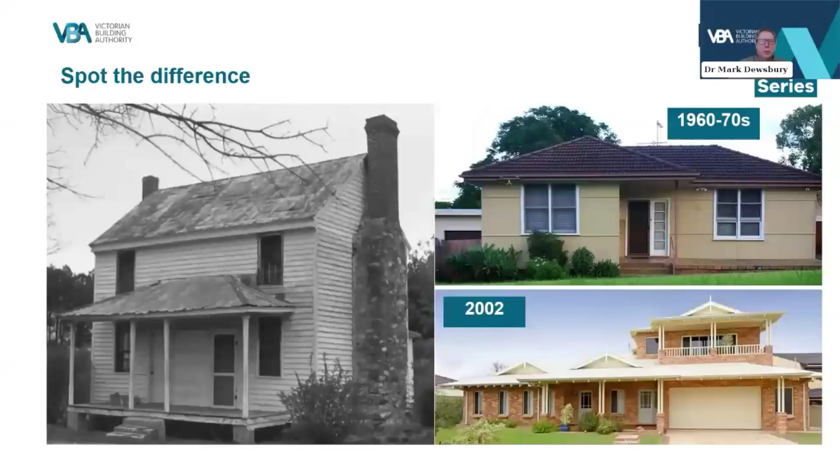When it comes to NATHERS, or the Nationwide House Energy Rating Scheme, and energy efficiency, we know that these two things are intrinsically linked to human thermal comfort. Two-thirds of how we experience the environment is the temperature of the surfaces around us - the floor, the walls, the windows, the doors, and ceiling.

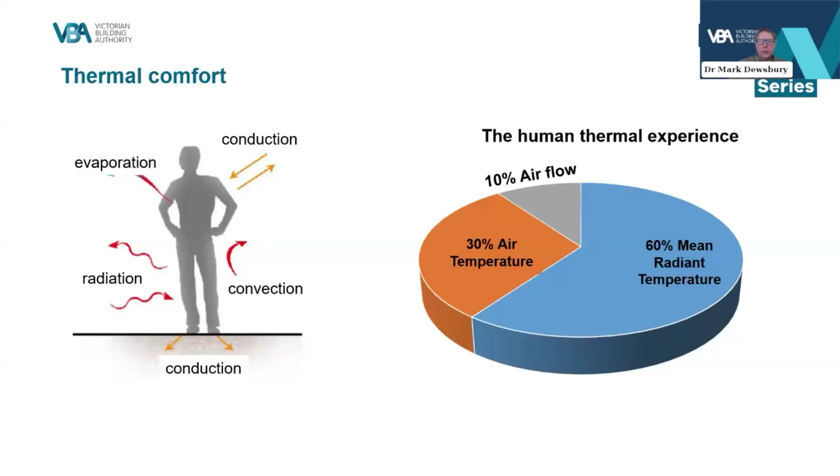We need to condition those surfaces to within our thermal comfort expectations using the least amount of fossil fuel-derived energy possible.

But we also need to consider how we protect our building during construction. We've used weather-resistive pliable membranes for decades to protect the structure whilst under construction and after completion. This stops the wind and moisture from progressing into the insulation layer. We also need to ensure that the cladding doesn't touch the weather-resistive pliable membrane, as between 1% and 7% of the wind-blown moisture reaches the interior side of the cladding systems.

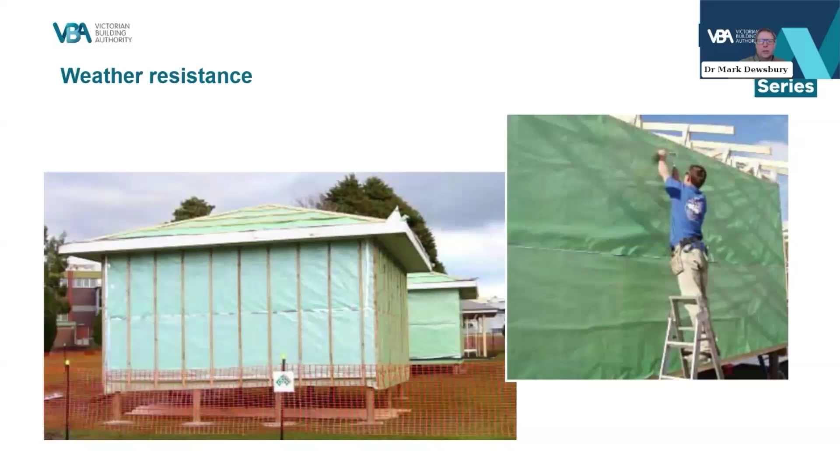We've also known for more than 50 years that these materials need to consider water vapour diffusion.

We all know about insulation. This should be installed hard against the floor, walls and ceilings with no gaps to minimise the energy needed to condition those surfaces. Importantly, our glazed windows and doors are also critical components of our insulation.

Airtightness and solar control systems - a common problem with many high-efficiency homes is overheating due to a lack of solar control.

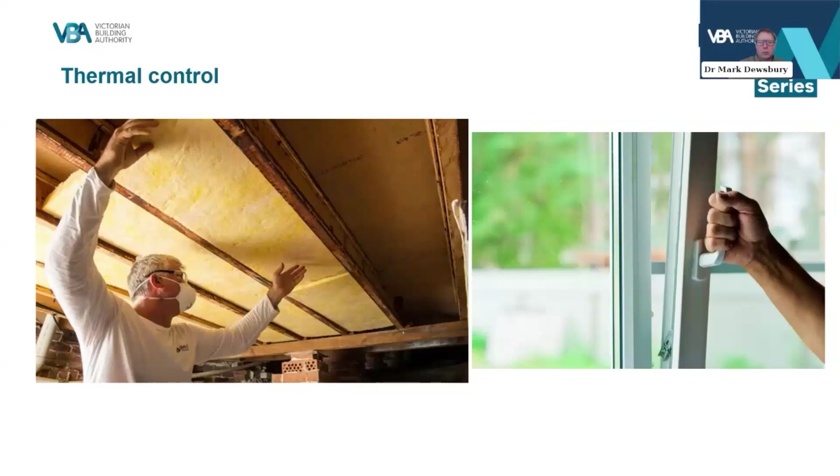Airtightness is critical in all climates, as it reduces the thermal comfort impacts of cold and hot drafts into the home. Within the NCC, or the National Construction Code, closely fitted plasterboard, skirting boards and cornices are our principal actions for airtightness.

When a house is new, this may be a good process, but as a house ages and the structure shudders under the force of many storms, small gaps appear, making the home less airtight and allowing lots of water vapour into external walls.

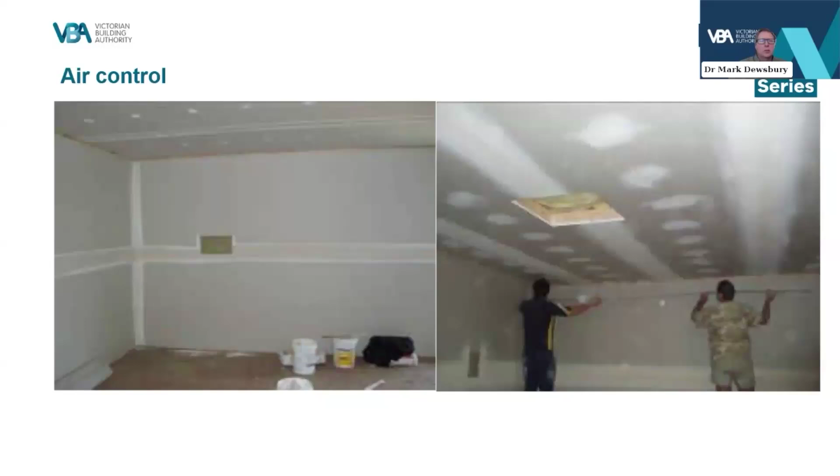Since 2016, the National Construction Code expects all homes to have a maximum air leakiness of 10 air changes per hour when a 50 Pascal pressure difference is applied.

A 50 Pascal pressure difference equates to a 32 kilometre breeze. This would mean that when a breeze of 32 kilometres is blowing, the air in the house changes 10 times in 1 hour. When a breeze is not blowing, the air change rate could be as low as 0.5 air changes per hour. So subject to the outside wind speed, the conditioned air in the home changes somewhere between 0.5 and 10 times every hour.

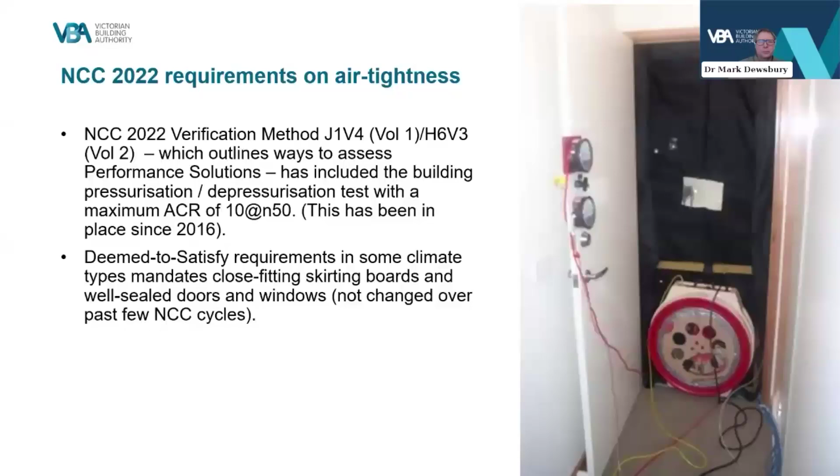Anything under 5 should have a balanced mechanical ventilation system to provide fresh air into the home. Everything over 10 doesn't meet the expectations of the community or the building regulations.

And since the 1980s, international experience has shown that anything under 8 air changes at N50 should have hygrothermal design considerations for the floor, roof, and external wall systems.

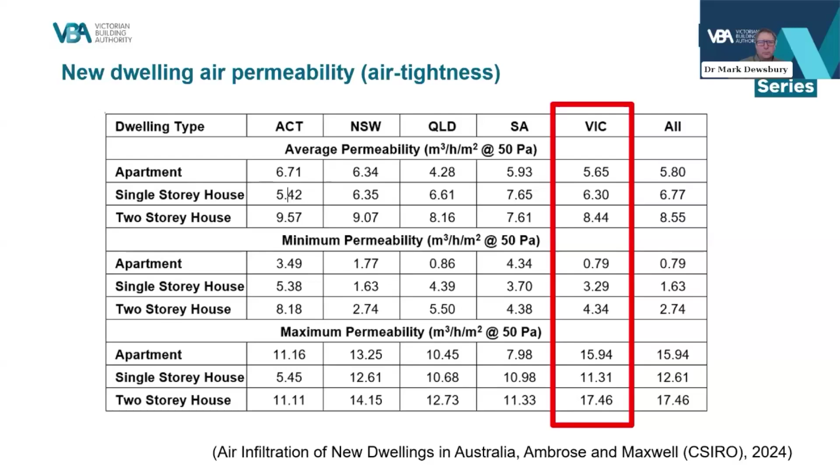Now, really importantly, ventilation is not air tightness. In Australia, we've never had a culture of ventilation. Our historically leaky homes did all the ventilation for us.

Within the building regulations, to avoid the need for mechanical ventilation, every habitable room needs access or borrowed access to an operable window. These windows need to be open every day to ensure that we are getting at least 0.25 air changes per hour in every room.

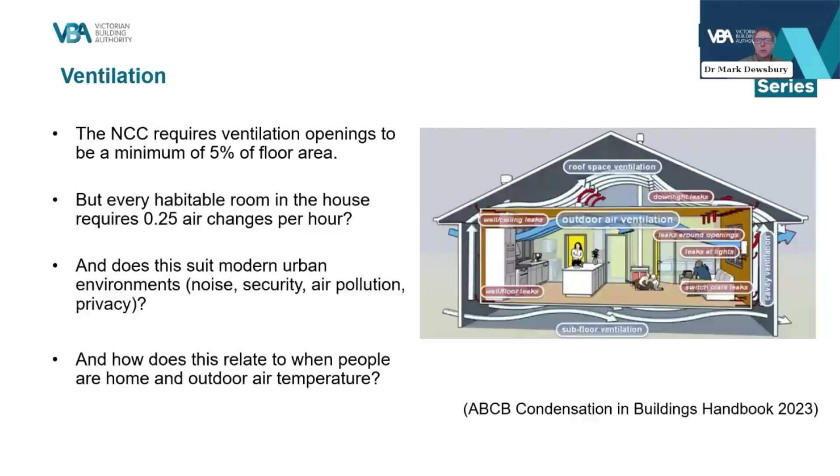But how does this relate to urban living or modern living? The hours spent at work, or the outside air temperature?

If we are trying to heat a home, why would we also open windows in every habitable room to ensure we have the required 0.25 air changes per hour? This highlights a misalignment in the regulations.

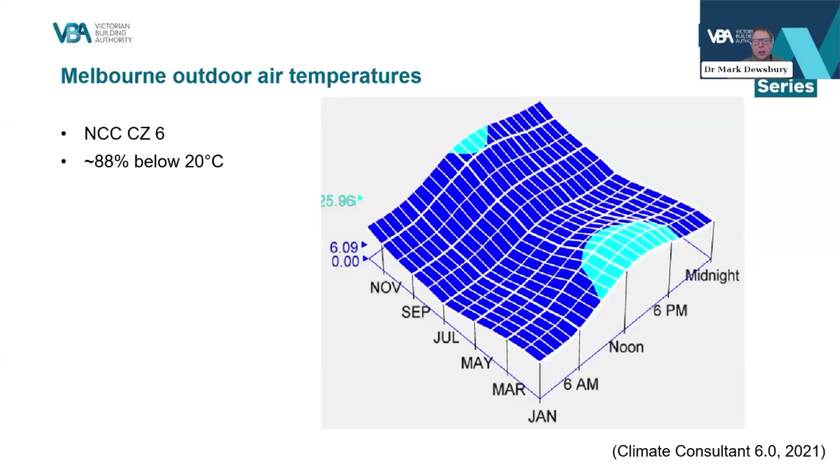Which brings us to condensation. Think of going to a club or a bar and asking for a cold drink. As the bartender fills the glass, condensation forms. But a few minutes later, the glass is dry.

In the first instance, the coolness of the drink forces the air around the glass to condense on the cold glass. But as the drink warms, the condensation returns to the air as water vapour. This process happens every day in our backyards, subfloor spaces, roof spaces, and exterior wall systems, and on single glazed windows.

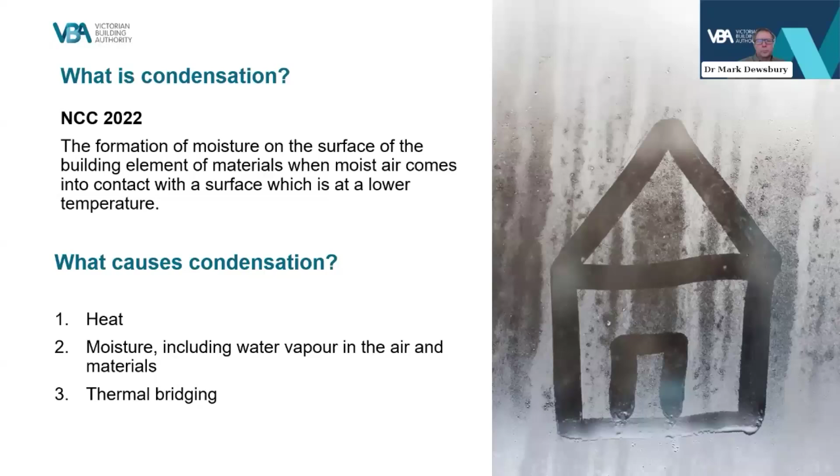If our living room is 20 to 22 degrees Celsius and our interior relative humidity is 80%, the dew point temperature, or temperature at which condensation occurs, would be 18 degrees Celsius. That indicates that any surface that is 18 degrees Celsius will support condensation.

If we manage the interior relative humidity to a maximum of 65%, we can reduce the dew point temperature to 15 degrees Celsius.

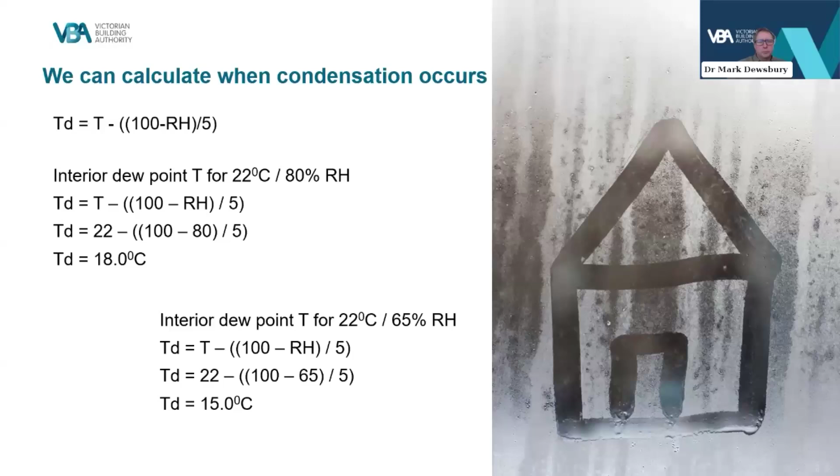What we haven't mentioned yet is the 10 to 14 kilograms of water vapour a family of four generates each day. This is not the liquid water from bathroom, kitchen and laundry activities, this is purely water vapour. As we keep adding more and more water vapour, we need to remove it from the building interior. Otherwise, surface and interstitial condensation and mould can occur.

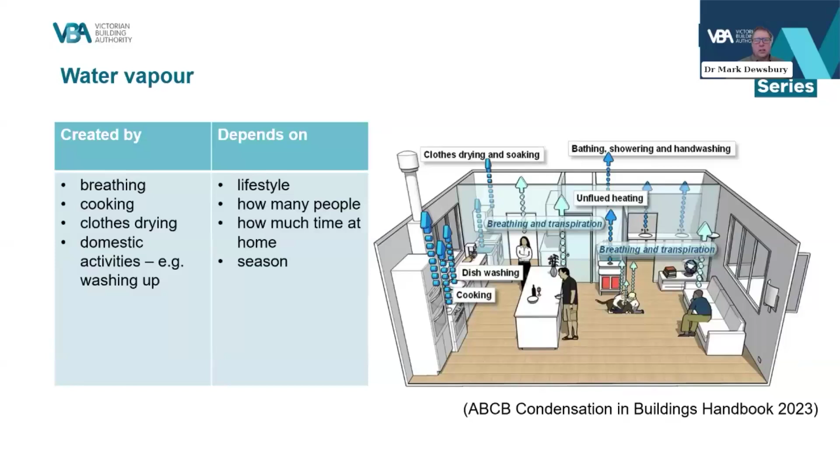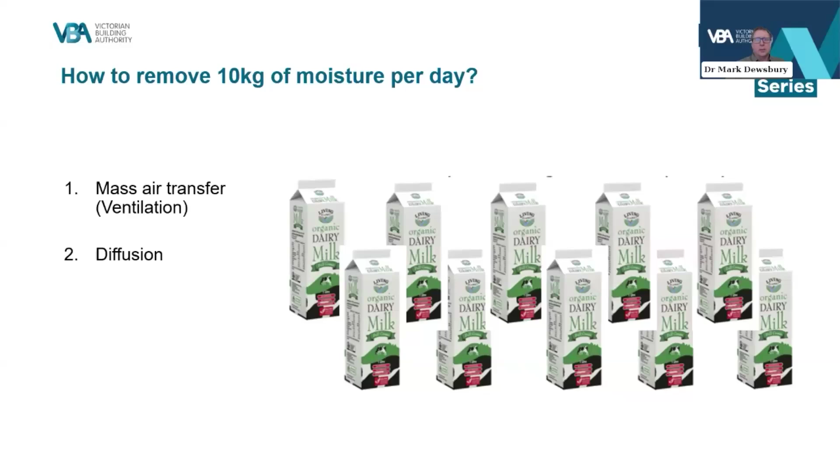We generally have two methods to remove occupant-generated water vapour in temperate climates, namely mass air transfer, or more commonly known as ventilation, and water vapour diffusion.

As the interior relative humidity increases, many materials in our home adsorb water vapour. Conversely, when the interior relative humidity decreases, many materials give water vapour back into the room. Technically, we call this hygrothermal buffering.

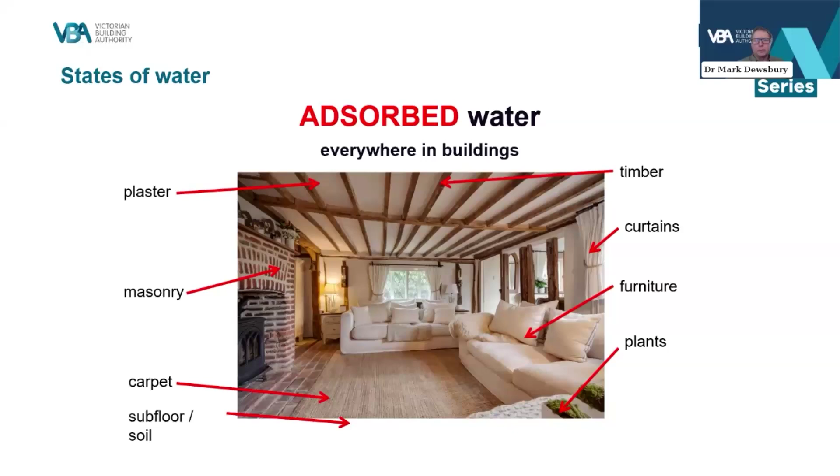This highlights that we can't stop condensation from occurring, but we need to manage interior generated water vapour, minimise thermal bridges, and design subfloor zones, roof spaces, and exterior wall systems to maximise drying potential.

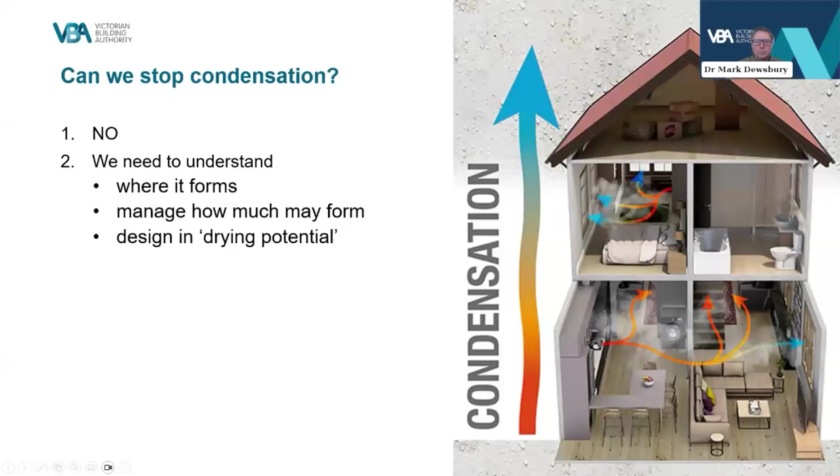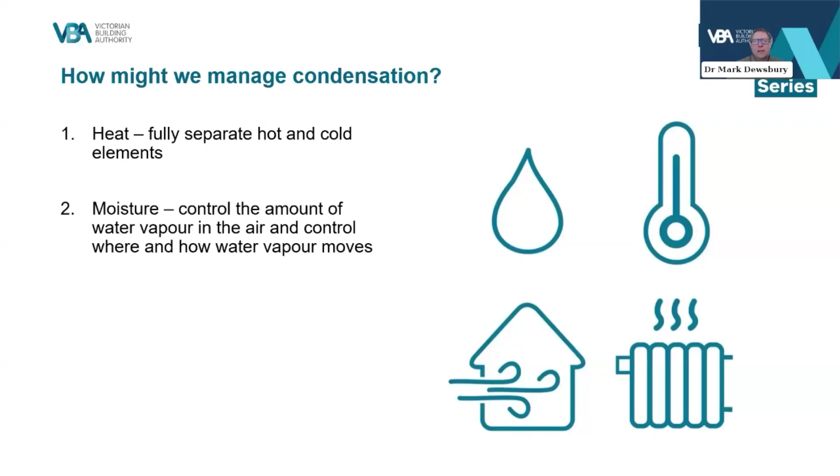So how might we manage condensation? When we think about heating, we need to fully separate hot and cold elements. In terms of moisture, control the amount of water vapour in the air and control where and how water vapour moves.

We now have a short quiz. Can you stop condensation from happening in homes? Yes or no? And what causes condensation in homes?

Now that you have finished the quiz, the answer to question 1 is no, that we cannot stop condensation happening in homes. And the answer to question 2 is all of the above. Our cooking, showering, breathing and drying clothes all contribute to condensation in homes.

This now brings us to mould. When we don't adequately control interior generated water vapour, condensation becomes very apparent very quickly.

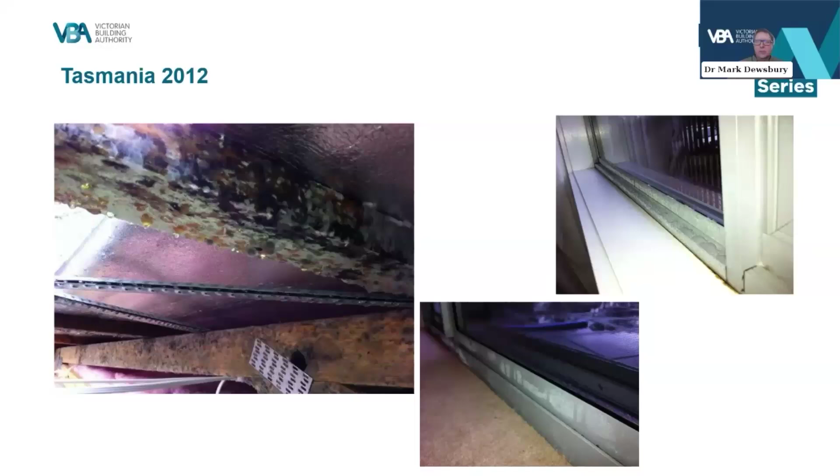Here we can see images on the left with condensation and mould in a roof space, and images on the right with condensation and mould on single glazed windows. All of these images are from homes that were less than 6 months old.

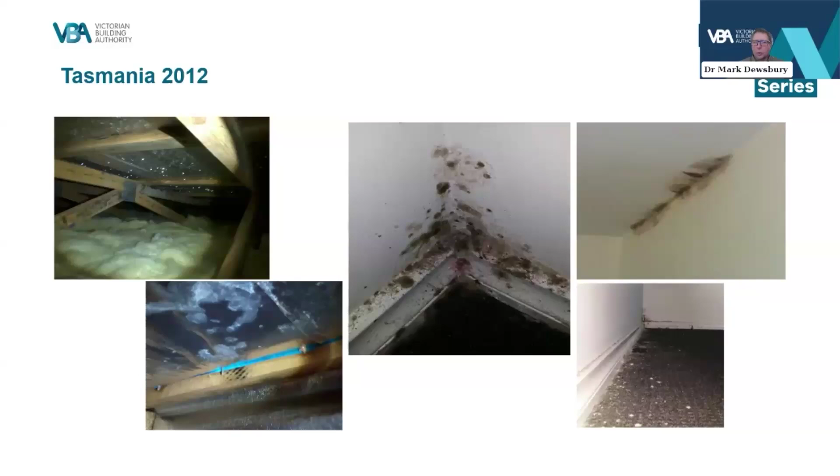Historically, Australians seem to have a love affair with mouldy homes. But since 2009, the World Health Organization has stated that no home or workplace should have a visible presence of mould. We can do a quick internet search and find a plethora of articles from very sick building occupants that have resulted from surface and interstitial mould in buildings.

Mould spores create an allergic reaction. They are so small that when we breathe them in, they travel through our lungs and straight into our bloodstream. Our body's immune system then kicks in to fight this contagion.

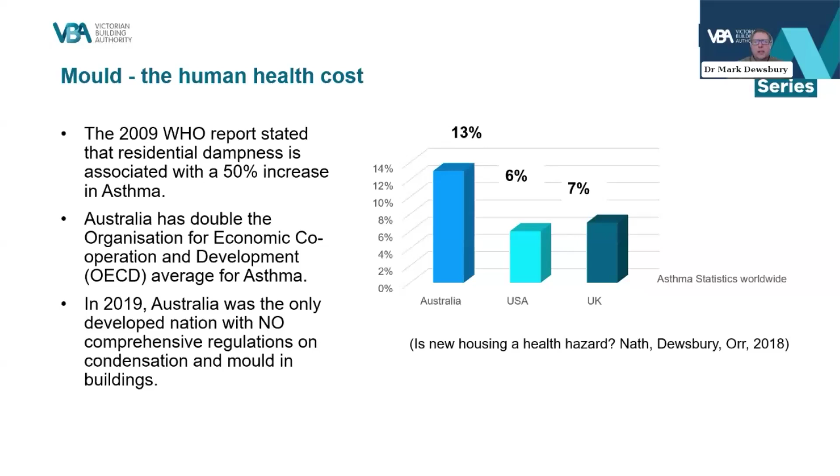Until 2019, Australia was one of the few developed nations that did not have any condensation or mould related building regulations, and we have had twice the asthma rate of many OECD nations.

So the NCC, or National Construction Code, and condensation. As mentioned earlier, since 2019 the National Construction Code has included some clauses regarding condensation in Class 1 and Class 2 residential buildings. Even though there has been lots of science since the 1930s, Australia's first national action was in 2016, a survey of design and construction professionals which identified that up to 40% of buildings constructed in the previous decade had a concerning presence of condensation or mould.

In 2019, the NCC required the use of a Class 3 water vapour permeable, weather resistive pliable membrane in climate zones 6, 7 and 8. In 2022, this was increased to a Class 4 water vapour permeable membrane in climate zones 6, 7 and 8, and added a requirement for a Class 3 water vapour permeable pliable membrane for climate zones 4 and 5.

But is this enough? The University of Tasmania research and the research conducted by the University of Wollongong suggest that it may not be enough. To partly address this gap, the draft version of the 2025 NCC has added requirements for all climate zones, and is likely to include a ventilated and drained cavity for all cladding systems.

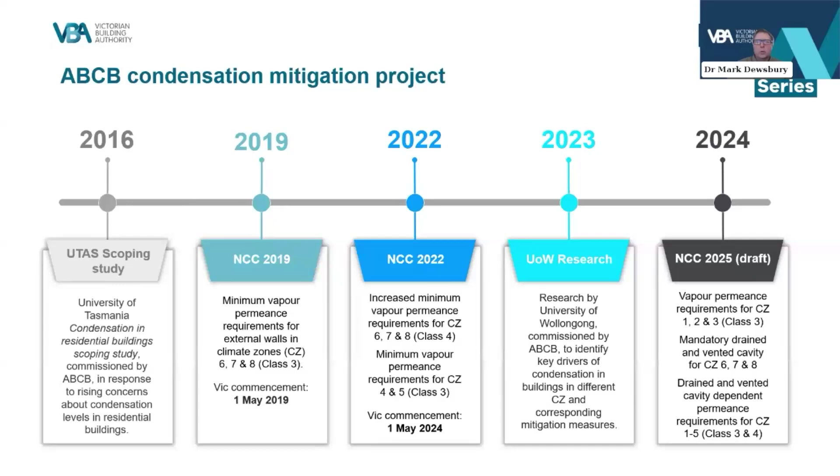As mould spores affect human health, the other significant change for the 2022 National Construction Code was the shift from focusing on condensation to focusing on mould.

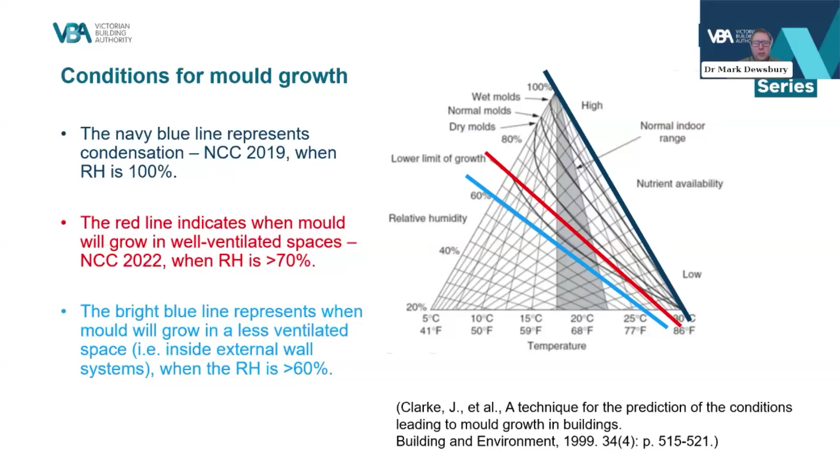This graph illustrates what we know about mould growth. Mould needs water vapour, temperatures above 5 degrees Celsius, and food. The blue line shows 100% relative humidity, or when condensation occurs, and this was the focus of NCC 2019. The red line shows 70% relative humidity, when mould will grow in a well-ventilated space, and is the focus of NCC 2022. The bright blue line shows 60% relative humidity, when mould will grow in poorly ventilated spaces, like the interstitial subfloor, roof spaces, and external wall systems, and on poorly ventilated surfaces around the home.

The 2022 NCC listed a new verification method that stipulates that an external wall system should not have a mould index that exceeds 3. Mould is all around us right now in its microscopic form, but it is invisible. When we change the conditions, its rate of growth increases and it can become visible. Overlapping the World Health Organization's recommendations, a mould index of 3 is when the mould becomes optically visible, or we can see it with the naked eye.

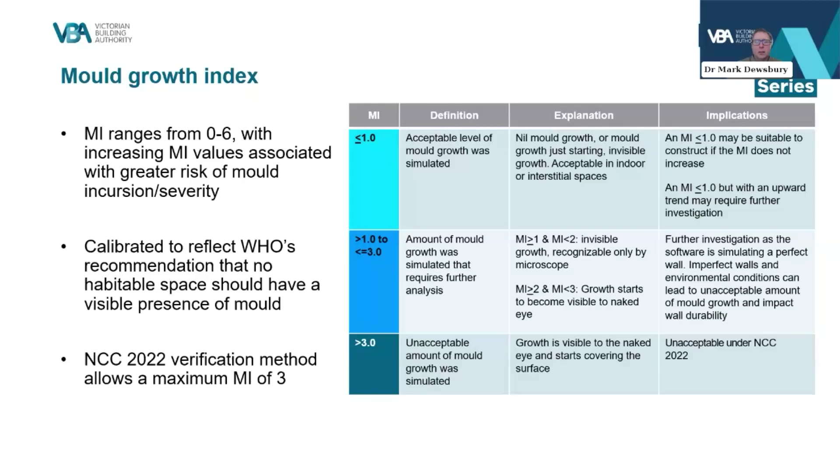To help address some of these issues, the 2022 NCC added enhanced requirements for interior and roof space ventilation. These actions are good, but for a house interior, the extra extraction ventilation described for bathrooms and kitchens is still relying on a leaky home or windows being left open in all rooms.

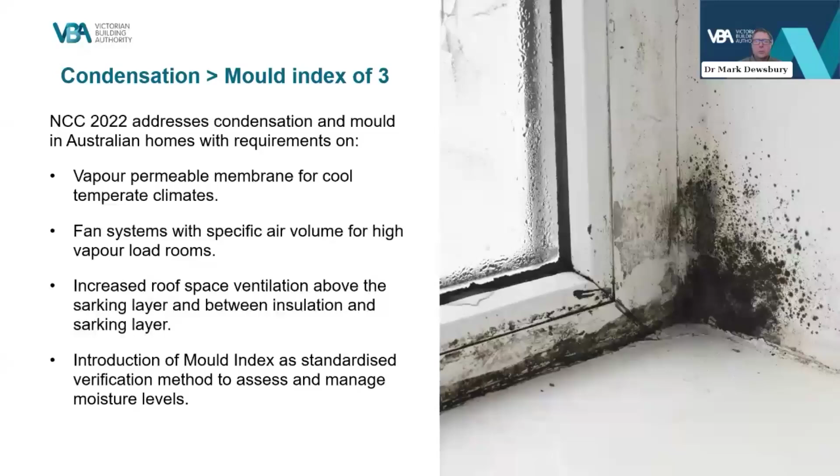As mentioned a few slides ago, there have been increases in the water vapour diffusion properties of exterior weather-resistive pliable membranes. Australian Standard 4200.1 describes the physical properties for pliable membranes that we may place on our exterior and interior walls and within our roof spaces.

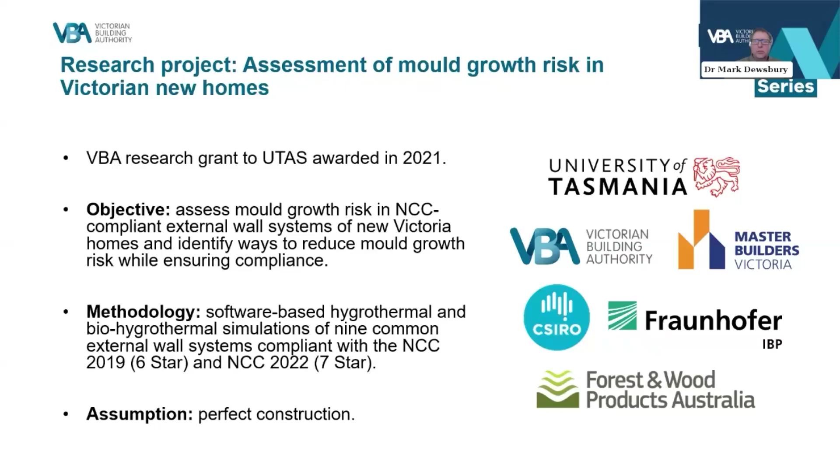This brings us to our research and our research insights. The University of Tasmania, in collaboration with CSIRO, Master Builders Victoria, the Fraunhofer Institute of Building Physics, and Forest & Wood Products Australia, obtained a research grant from the VBA to further explore what may be needed to address moisture and mould risks in modern energy-efficient low-rise, timber-framed external wall systems constructed in Victoria.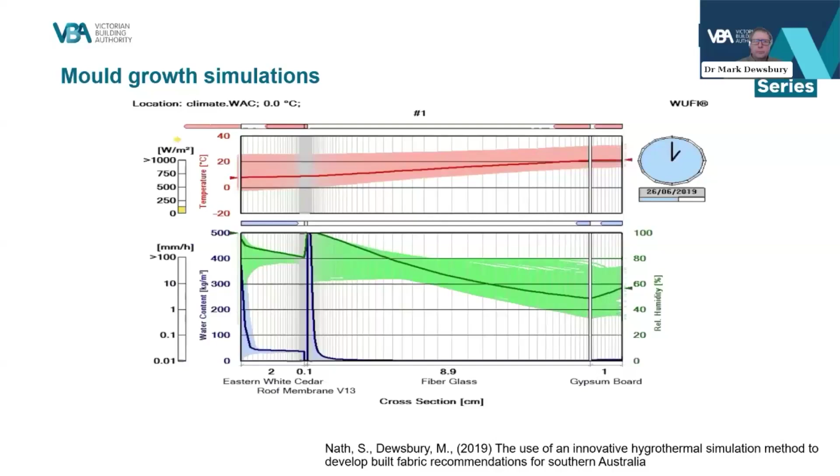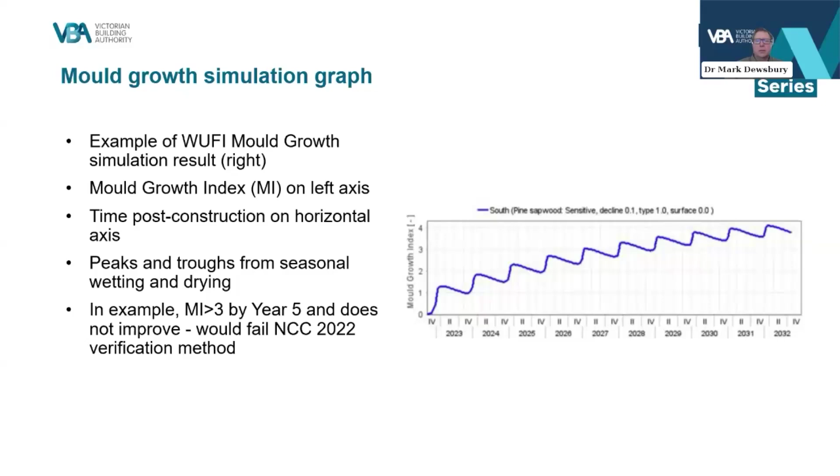The research identified that in most cases there was no liquid moisture accumulation, and that non-equatorial facing southern walls, or shaded walls in other orientations, demonstrated the greatest potential risk. Enhancing the water vapor permeability of the exterior weather resistive layer, combined with a ventilated and drained cavity between the cladding system and the weather resistive layer, and adding an interior vapor control layer, provide the most robust outcomes.

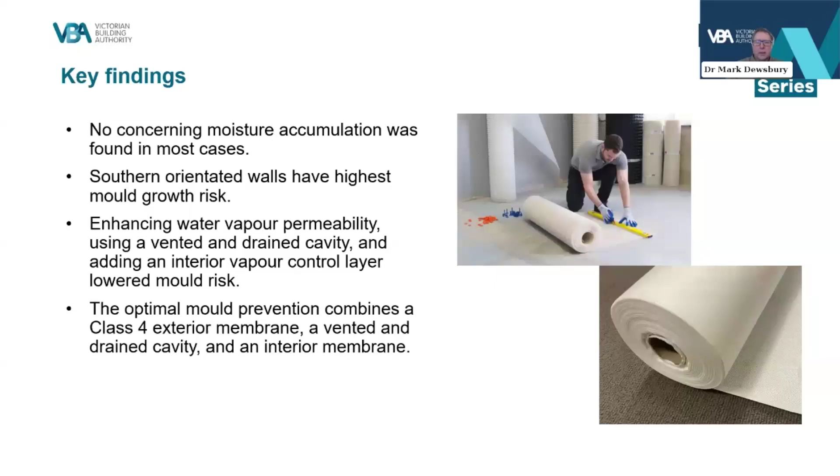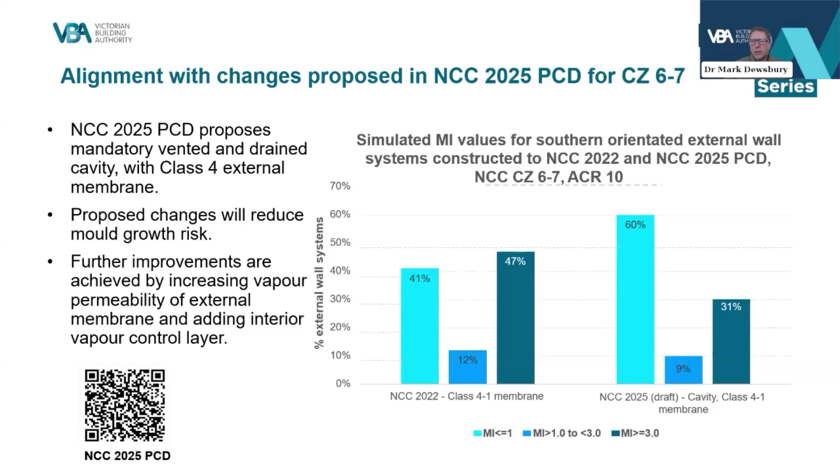When the proposed requirement for a vented and drained cavity is added, the number of external wall systems with a simulated mould index of more than 3 reduces to 31%. NCC Climate Zone 4 is more challenging.

When a vented and drained cavity is added, the number of external wall systems with a simulated mould index greater than 3 increases to 67%.

When the vapor permeance of the weather-resistive pliable membrane is further increased, the number of simulated external wall systems with a mould index greater than 3 reduces to 43%.

This is where we need to be careful. The simulations are imagining a perfect wall. Future research needs to explore the impact of the 1% to 7% of wind-driven moisture reaching the weather-resistive layer when there is no cavity between the cladding system and the weather-resistive pliable membrane.

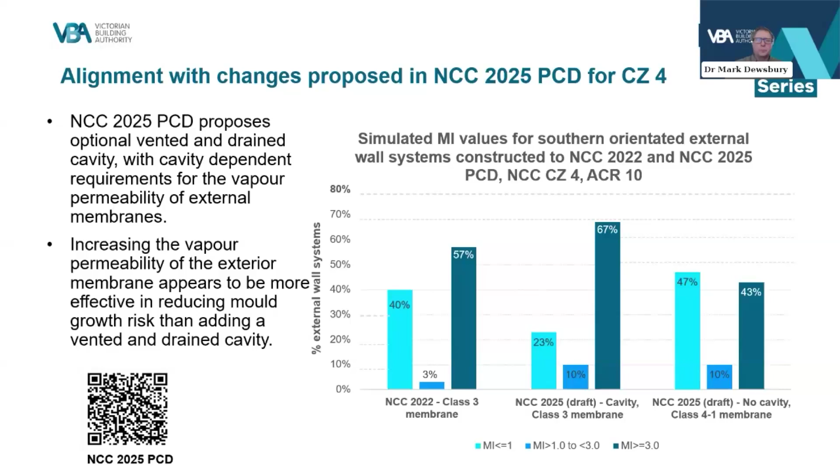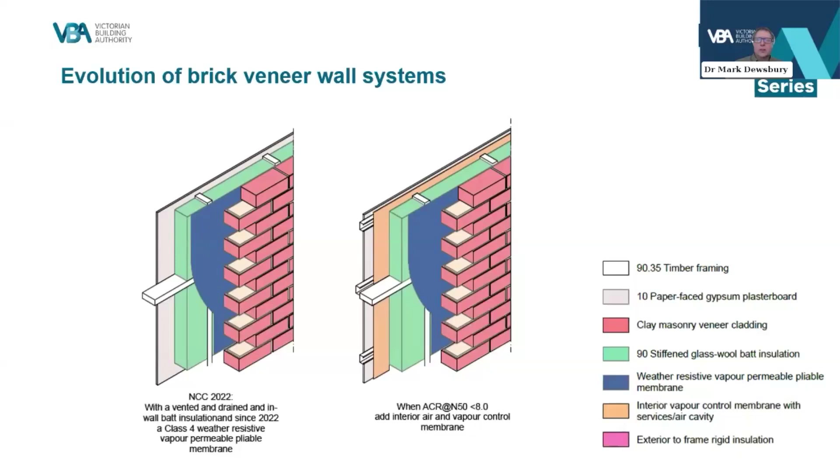These same principles apply to other forms of clad timber or steel framed exterior wall systems, where we have evolved to insulated walls with an exterior vapor control layer, but to date there is no requirement for a vented and drained cavity.

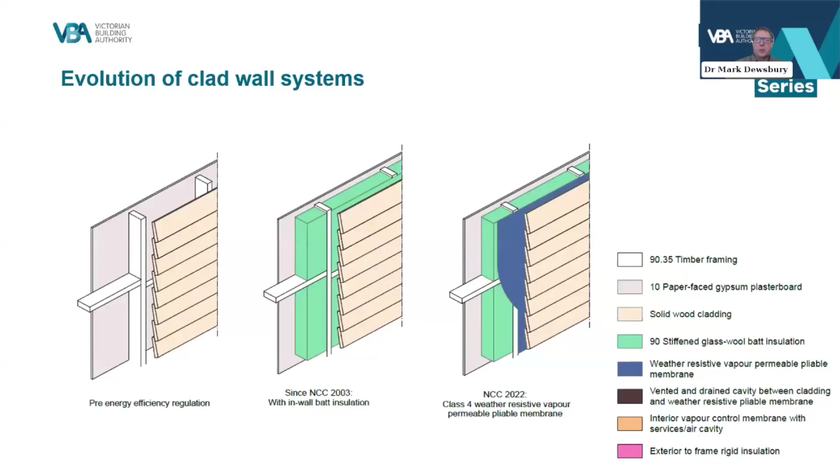Looking ahead, we should be adding a vented and drained cavity, which could be teamed with an interior vapor control membrane and an exterior rigid insulation.

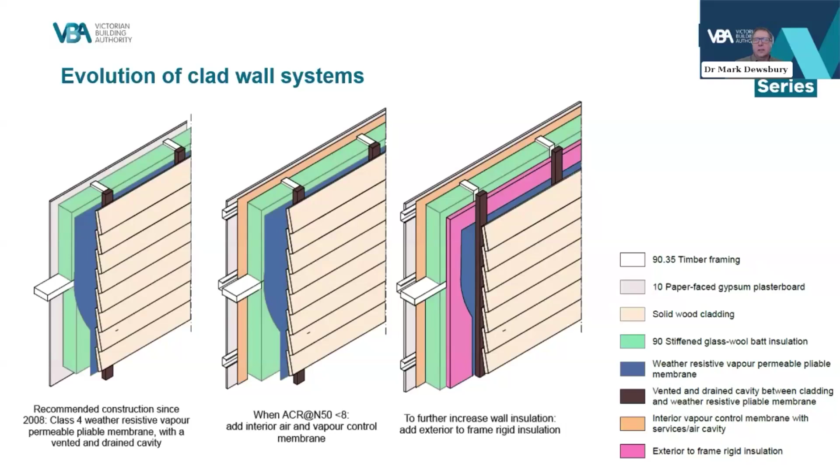Some practical tips: ensure you are complying with the minimum requirements as prescribed in the National Construction Code. Remember, the code is the minimum standard and not best practice.

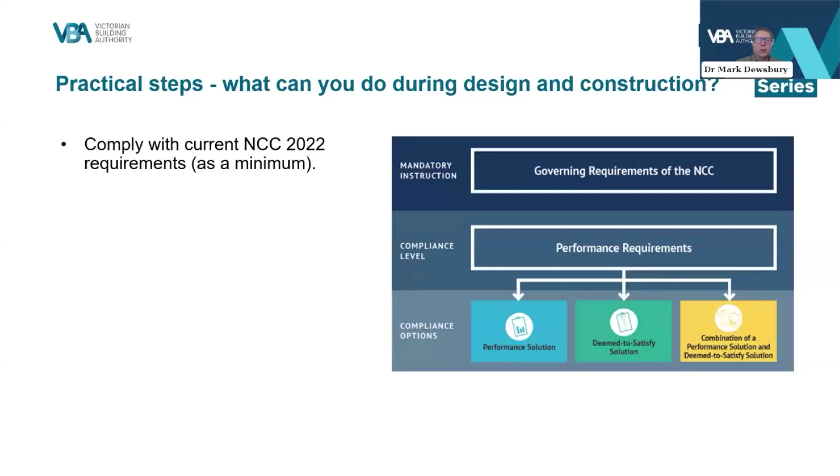Ensure the detailing adequately addresses well-known points of moisture ingress. Ensure the products you use are appropriately tested and certified.

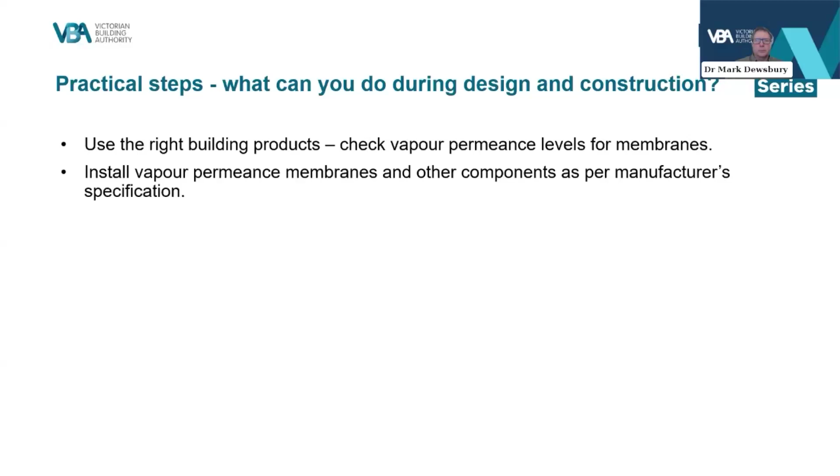The table in the top right corner is a snapshot from Australian Standard 4200.1 2017, and shows the numeric water vapor diffusion properties for water vapor permeance of pliable membranes. Example 1 shows an inappropriate value for a different system. Example 2 shows an appropriate value, listing the rate of water vapor permeance as 2.983, which exceeds the minimum amount prescribed in the standard of 1.1403.

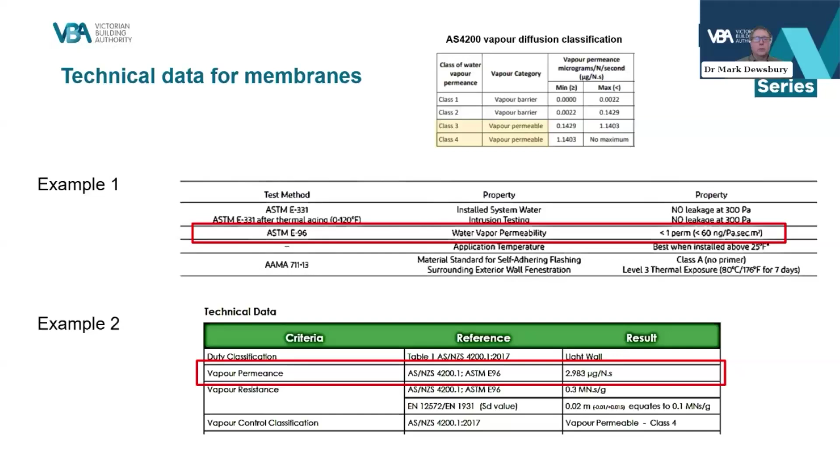Example 3 shows a more comprehensive label that lists compliance with the Australian standard, is a Class 4 pliable membrane, and has a water vapor permeance rate of 2.179, which exceeds the minimum amount prescribed in the Australian standard.

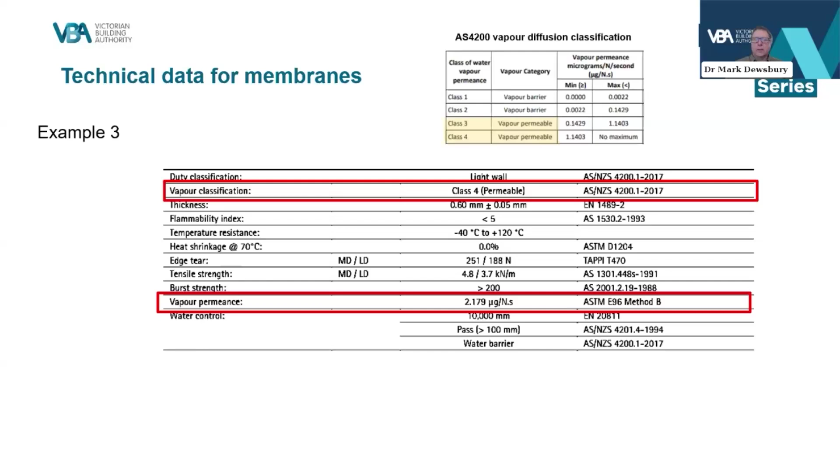Even though not required in the NCC, for external wall systems, consider adding a vented and drained cavity between the cladding system and the weather-resistive pliable membrane, increasing the water vapor permeance of the weather-resistive pliable membrane, and adding an interior vapor control membrane. For mass air transfer, consider adding background ventilation.

During construction, try to keep all materials dry and to ensure mold growth is minimized during the construction process.

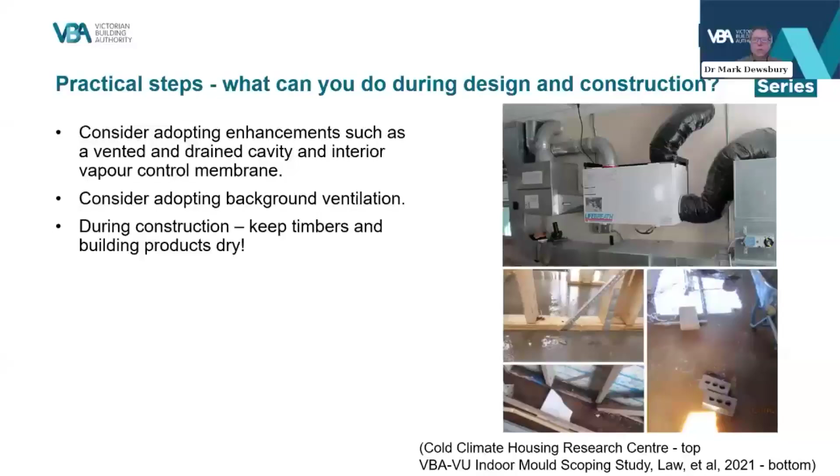Explore resources provided by government, industry, and community organisations that discuss what is needed to be considered in modern energy-efficient homes to minimise moisture and mould.

If we are doing activities that add extra water vapor to the home, open windows or ensure you have a balanced ventilation system that removes excess water vapor.

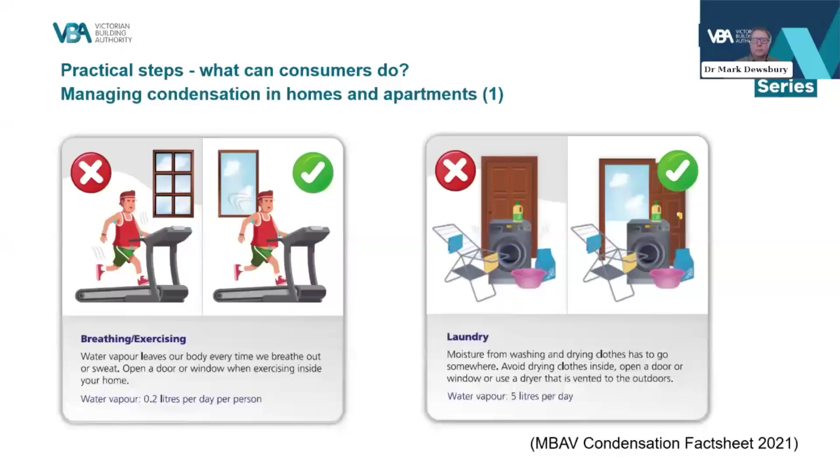In bathrooms and kitchens, make sure you use an extraction system with the window open, or explore a balanced ventilation system.

This brings us to our next quiz. Increasing the vapor permeability of an external membrane may lower mould risk of an external wall system. And question 6, what should you avoid while doing laundry to prevent condensation?

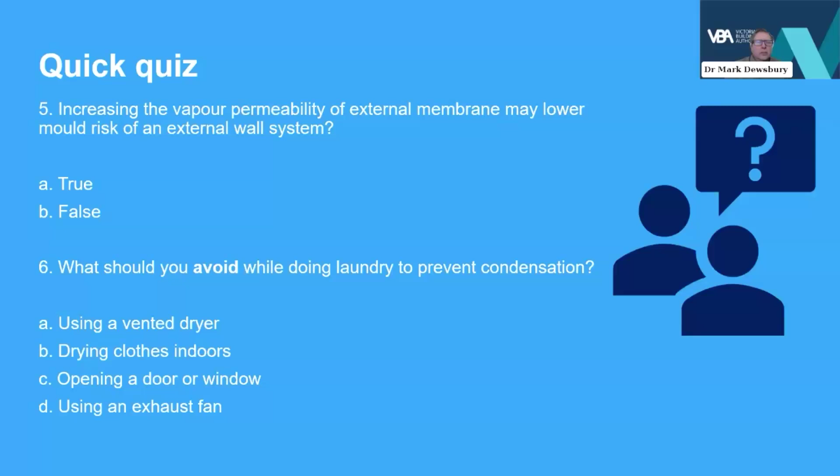So the answer to question 5 is true. Increasing the vapor permeability of an external membrane may lower the mould risk of an external wall system. And the answer to question 6 is drying clothes indoors. So what should you avoid while doing laundry to prevent condensation? Avoid drying clothes indoors.

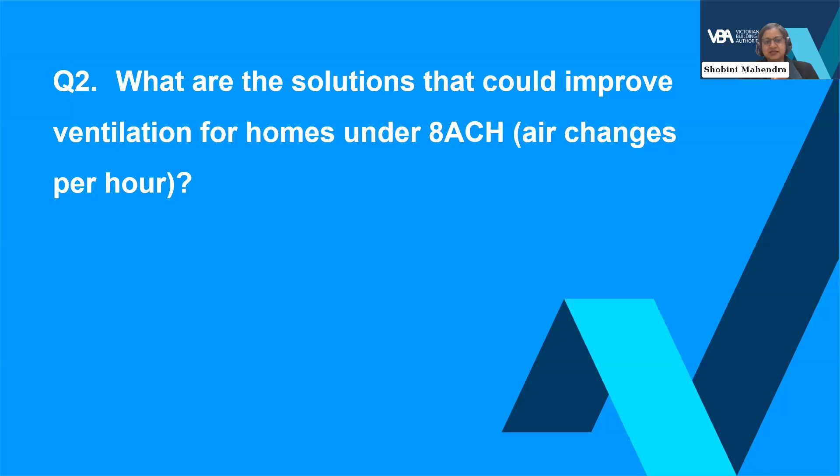Thank you, yeah, that's a good question. This is a common issue raised by many builders. I've received many phone calls from builders on this exact issue. And we have what we call transit-based mold, storage-based mold, and mold during construction.

Transit-based mold - there's interesting research we conducted at the University of Tasmania, published by UTAS in 2023, that explored the issues regarding timber damage during transit. This included the temperatures and moisture conditions that timber experiences. One finding was the need to use a vapor permeable wrapping system for packs of timber, rather than the standard vapor impermeable plastic wrapping.

With this in mind, as soon as a pack of timber arrives on site, it should be moved to a location where it is out of the weather, namely sun and rain, and if wrapped in plastic, have the plastic removed. In the notes we'll provide, there'll be a link to that conference paper that was published on that matter.

For storage on site, it should be stored in a location where it is out of the weather, namely sun and rain, and not wrapped in plastic.

Mold during construction is rare, unless there is a lack of ventilation or excessive rain. Remember, mold grows when the temperature is above 5 degrees Celsius and the relative humidity is above 60%. If timber framing does become excessively wet and enclosed, ensure you allow plenty of ventilation every day so the timber can dry naturally and mold will revert to its normal microscopic form.

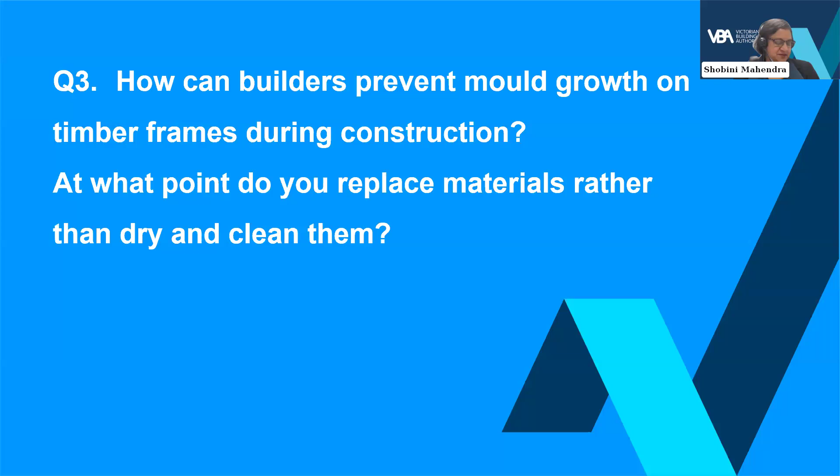Yes, I get many phone calls from people with holiday houses where they've been away for a few months and come back to a house that's wonderfully toxic inside. This is another common one. Yes, leaving a house locked up and vacant, even for one month, can significantly contribute to mold formation due to the following factors.

The accumulation of dust in a vacant home provides mold spores with an ideal food source, especially in damp environments. A lack of ventilation can support the daily formation of moisture on thermally bridged surfaces like windows, window frames, structural steel elements, and external walls, floors, and ceilings that don't have insulation. I've been sent many photos of condensation in unoccupied houses.

Some rooms in the house will become very warm due to solar radiation, allowing the air to suck in water vapor. But when those same rooms become cold at night and the air is searching for thermal bridges to release moisture, that allows condensation to occur, which supports mold growth. If ventilation isn't operated on a daily basis, the house will experience fluctuating temperatures, leading to condensation on windows, walls, and other surfaces, causing moisture accumulation that can fuel mold growth.

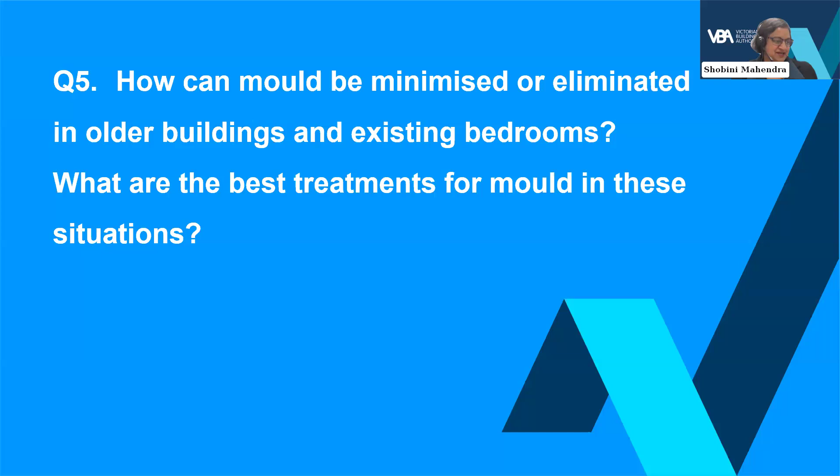Thank you, Mark. I'm mindful of time. We have maybe one quick last question. Carly, can you take us to question 7 or 8, I think. Next one. Next one, Carly, the next one after that. I'm just looking at what we can do in another minute.

In the 2022 National Construction Code, I mentioned a new verification method that talks about what we call hygrothermal simulation. And the verification method mentions the AIRAH document, DA07, as the simulation method to complete for that verification method. That's a roundabout way of saying it, wasn't it? But within that, that's what we call a hygrothermal simulation.

So the graphs I showed regarding temperature and heat moving through a wall are from a hygrothermal simulation. If you're going in that pathway, and I recommend it as a good pathway to take, firstly, the builder or homeowner needs to ascertain the skill level of the person performing the service. I actually just read an email regarding a talk I gave a few years ago about the wild west of hygrothermal simulation. So you need to interview the person, and understand that they have a good understanding of building physics and that they understand how the software works. Secondly, the climate data selected will have a major impact on the simulation results.